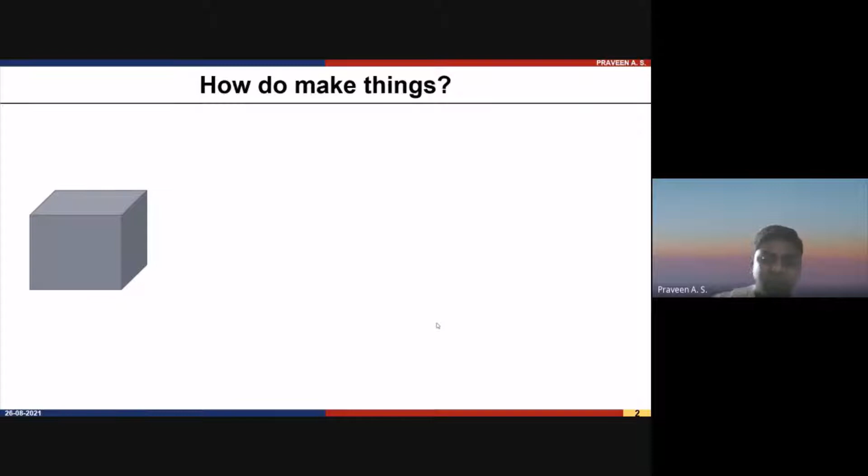Before going to the topic, you should know why additive manufacturing is very important. Let me ask you this question: how do you make things? How do you convert a chunk of bulk material into something useful, like this product? You have a box of material, and you want to make a useful product—for example, a spanner. So how do you make this spanner?

There are different manufacturing approaches. You can use formative manufacturing techniques, or subtractive manufacturing techniques. The third and most recent technique is additive manufacturing.

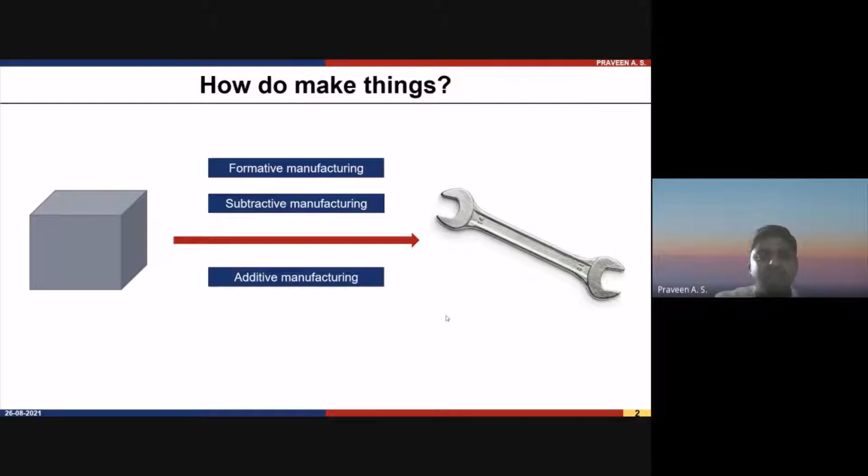Let's look at these three categories briefly. What is subtractive manufacturing? I hope you're all from a mechanical or manufacturing background—you know subtractive manufacturing removes material from the bulk chunk using different tooling approaches. The most commonly used are CNC machines and machining processes like milling, grinding, and drilling. All of these come under subtractive manufacturing—we remove material from the bulk to get the final desired product. Here you need specific tooling, different kinds of tooling to realize different parts.

Next is the formative process, which comes under forming. You know what forming is—it's like a smithy. We take the bulk material and apply force to deform its shape to get the desired product. This can be done in a cold or hot condition.

Casting also comes under formative manufacturing. In casting, we have a mold with a hollow cavity that gives the desired shape. We pour molten metal into it, give sufficient time for cooling, and then remove the mold to get the desired shape.

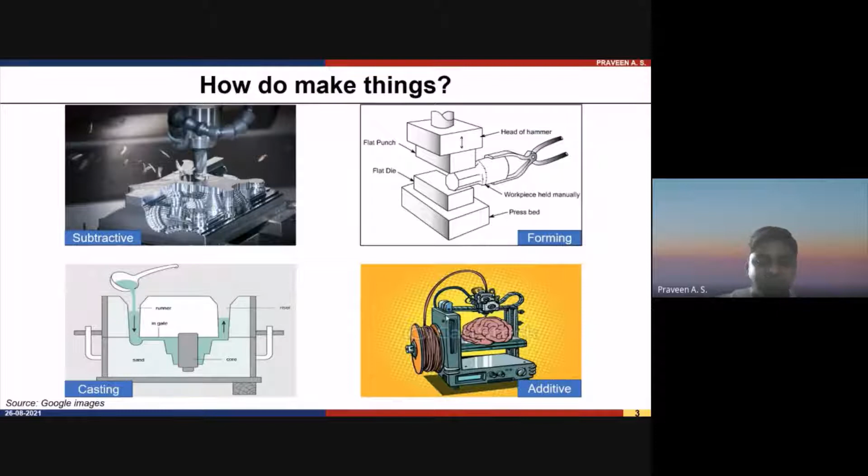The recent technique we are very much interested in is the additive manufacturing process. Why everyone is interested in additive manufacturing is that we can generate complex shapes of components at an easier or faster rate—no complexity required. That's why nowadays additive manufacturing processes are of great interest in industry and academia, with researchers and industry people moving towards developing these techniques for their own applications.

This topic is especially for ceramics. Conventionally, ceramics are processed using spark plasma sintering, hot pressing, pressureless sintering, or slip casting. These conventional techniques have limitations—they can only fabricate simple geometry with moderate size, not big size. Also, processing ceramic material is very challenging because when we machine it, it causes breaking due to its brittleness.

That's why researchers are very much interested in developing ceramics through 3D printing. With 3D printing, we can fabricate almost near net shape structures with some complexity, and we can make them in no time.

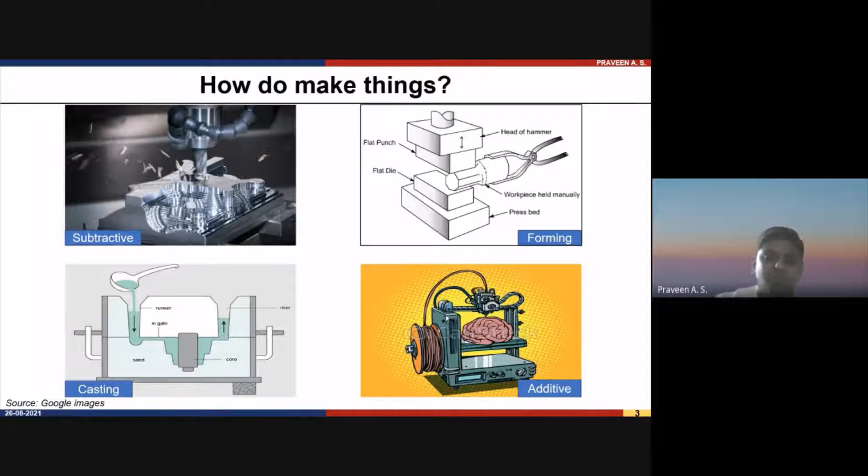So another question I want to ask is: what is additive manufacturing and 3D printing? Are both the same, or are they different? Can we use these terms interchangeably, synonymously?

So nowadays all the processes are considered, so as per ASTM standard, there are seven additive manufacturing processes. All are considered as either additive manufacturing or 3D printing, but you should understand that there is some difference between additive manufacturing and 3D printing.

Here you can see the definition given by ASTM, the American Society for Testing and Materials. They formulated a committee especially for additive manufacturing technology in order to differentiate and standardize each process. They have given the definition for additive manufacturing as a process of joining materials to make objects from 3D model data. You need a 3D model for making any product with additive manufacturing techniques.

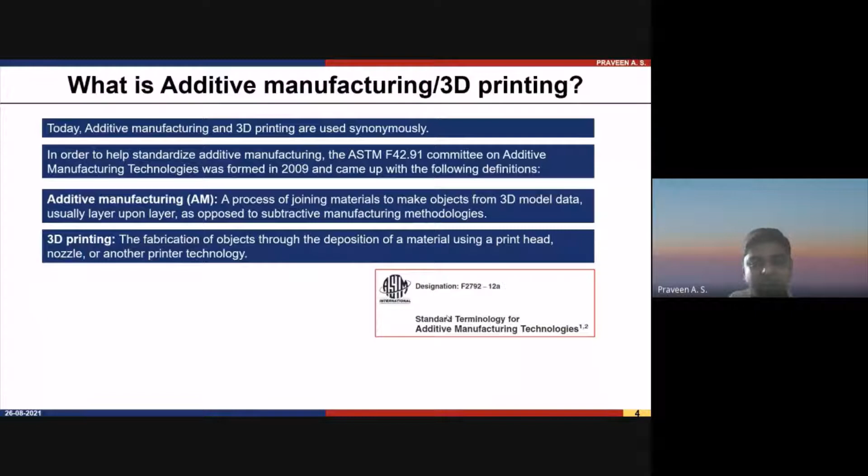Now, as I told you, the reason we are using additive manufacturing technique in all areas - whether conventional techniques like formative and subtractive manufacturing are not suitable, or whether we have to eliminate these processes and only focus on additive manufacturing - that is the question.

I will tell you an example. If you consider biomedical application, we need to fabricate complex designs. Suppose you are designing an implant, that implant design will vary from patient to patient, one person to another. That time we can use additive manufacturing techniques. The conventional technique like formative and subtractive manufacturing is not suitable for fabricating a complex shape with a low number of parts to produce. That's why additive manufacturing is very popular in biomedical applications.

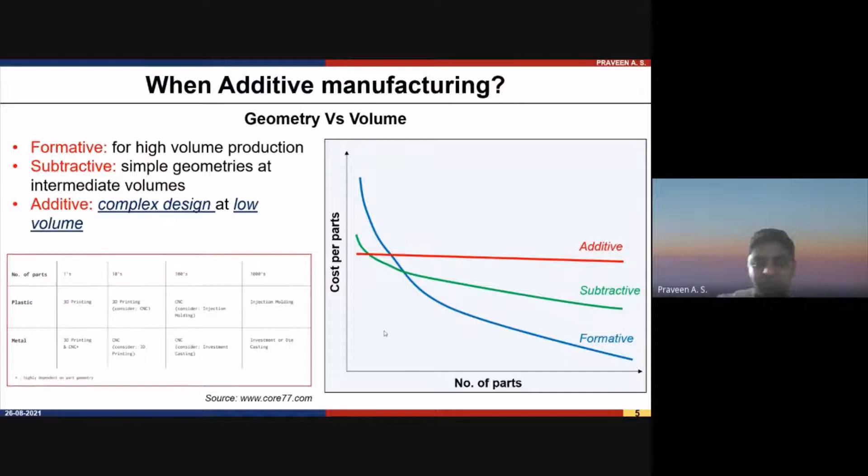Let's see the advantages and disadvantages of additive manufacturing technique. As I told you, additive manufacturing adds material in a layer by layer fashion. Whenever you require to fabricate any complex geometry, especially for biomedical application, we have to rely on additive manufacturing, because we can easily fabricate this complex geometry at a very faster rate. If you go for conventional methods, you have to process the material through different processing techniques - first milling, then drilling, grinding. That is a very complex and time consuming process. But in the case of biomedical application, we cannot develop an implant that way.

We have to develop the implant in a very short period of time, because the patient is suffering from injuries. So we have to replace that implant at a faster rate. That can be achieved through additive manufacturing and rapid prototyping. The additive manufacturing technique was earlier used for rapid prototyping, but nowadays we are using this technique for realizing the final component.

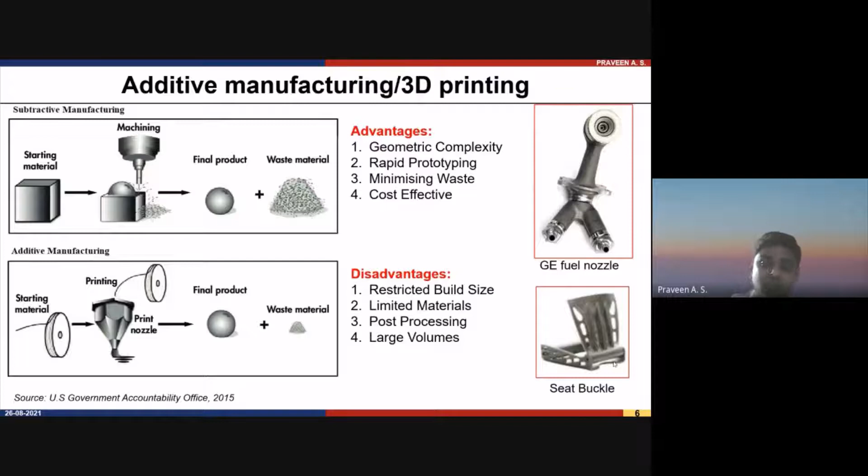Even if you could reduce the weight of any aircraft component by just 0.5 kg, we can save fuel by around 100 liters per year. There is some statistics on that. So all aerospace industries are trying to implement these kinds of designs to reduce the weight of the aircraft.

So then let's see what additive manufacturing is. As I told you, I'll be covering some of the basics of additive manufacturing. Additive manufacturing is a process by which we can fabricate a component in a layer by layer fashion. The first basic thing you require is digital data - you need a 3D model of the data to be fabricated. You should have that. So how can we create that data?

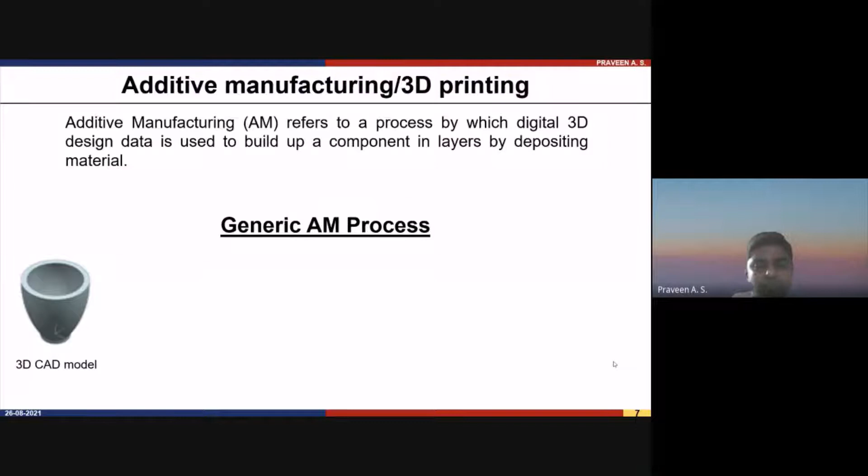Nowadays there are standard 3D modeling software available - Fusion 360, CATIA, ProE, there are different varieties of software. In that software, you can create that 3D model. There's also some other techniques, where we can use laser or optical scanners - if you scan the object to be printed, using some image processing software, you can create the 3D data.

The third technique, which is widely used in biomedical applications, uses CT scan data and MRI scan data to develop the 3D model data. For that, in biomedical applications, there are sophisticated image processing software like Mimics, which is widely used but very expensive. If you are a beginner doing research in biomedical applications, you can use ITK Snap, a free software, to analyze the CT scan data.

CT scan data is a series of images. When you analyze through the software, you can use that image data to create the 3D model. So if you want to develop any implant for any biomedical application, we have to use this technique. We have to process, we have to take the CT scan of the damaged part or any broken bone, or MRI scan. From that MRI scan data, you can process through the software so as to develop the 3D model. So that's the first step.

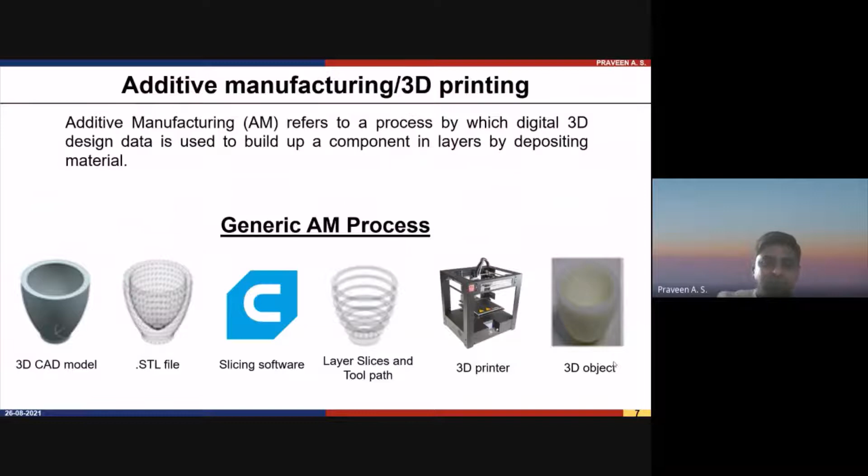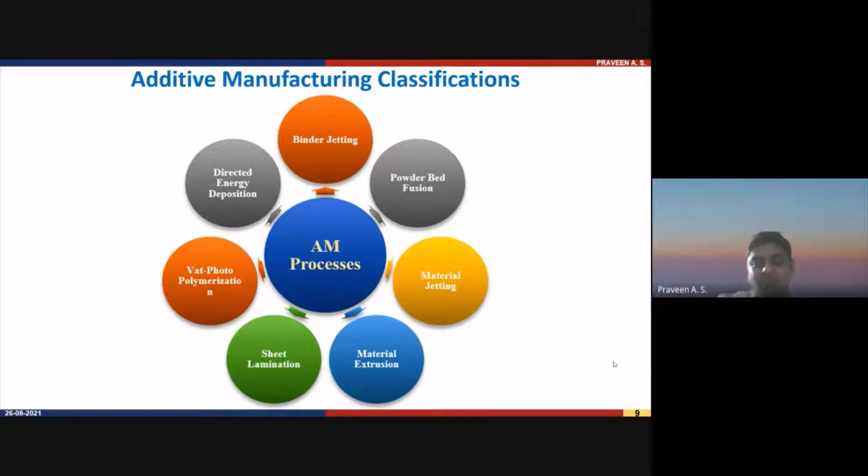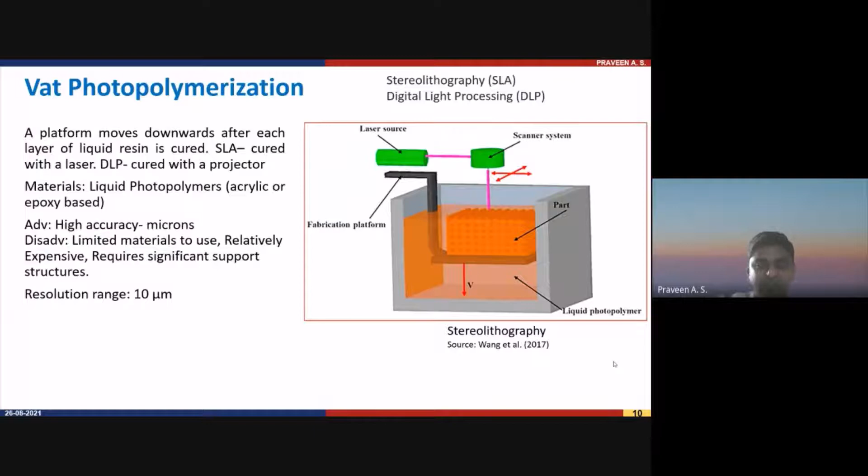As per the ASTM F42 committee, they have classified additive manufacturing into 7 categories: binder jetting technique, powder bed fusion technique, material jetting, material extrusion technique, sheet lamination, vat photopolymerization which is called stereolithography, and directed energy deposition. In this talk, I'll be focusing on the material extrusion technique. You already have gone through these basic classifications of additive manufacturing process.

With that assumption, I'm moving to the direct ink writing technique. Direct ink writing technique is similar to material extrusion. You are all familiarized with the FDM process, right? FDM process is a material extrusion process. In FDM, the material to be printed is in the form of a wire or filament, which is fed into a nozzle, a heated nozzle.

The heated nozzle will be heated to a temperature sufficient to melt the filament. In the case of polylactic acid (PLA), the usual temperature will be around 200 to 220 degrees Celsius. So if you apply that heat to a heated nozzle, the material will get melted and flow through that tiny nozzle, which has a diameter of 0.4 mm.

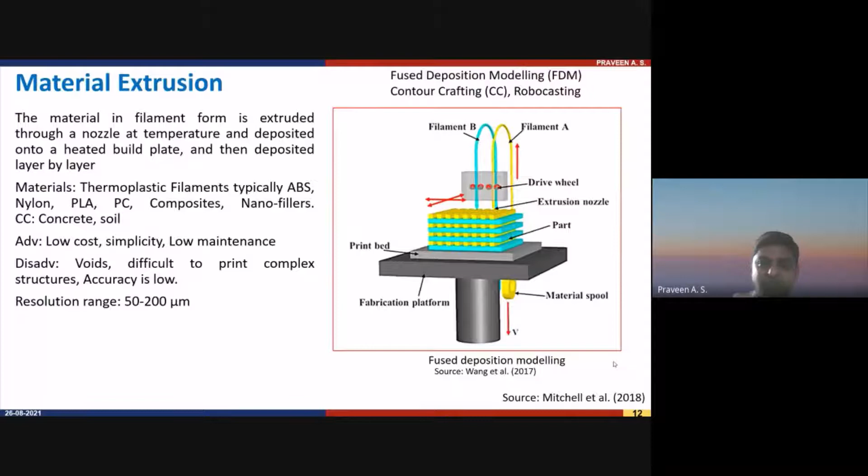So thereby the deposition is taking place. That process path and everything you have to create using the slicing software. So that is a material extrusion process. In today's discussion also, it's material extrusion, but there is some slight difference from the FDM process.

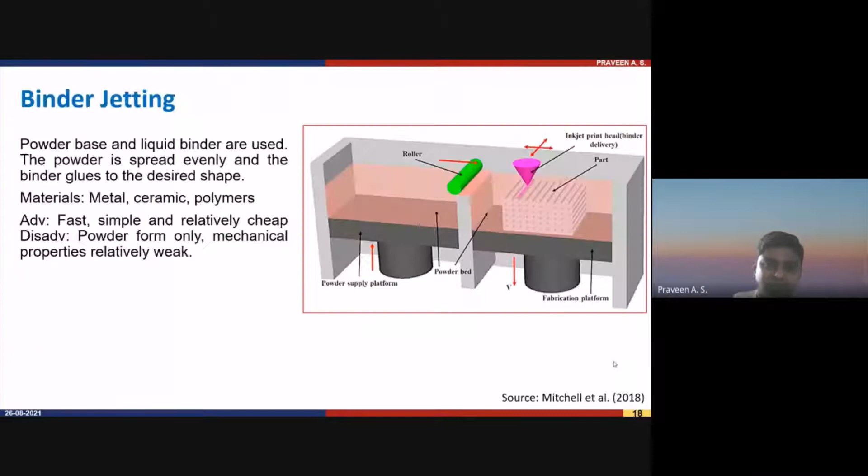So we'll move on to the second phase of my talk, which deals with direct ink writing techniques. As I told you, direct ink writing is an extrusion-based additive manufacturing technique. What you need is a material in the liquid phase—it can be an ink or a gel, whatever it is. That gel will be extruded through a small nozzle.

Here you can see on the left hand side—this is the extrude barrel. At the end of the barrel, you have a nozzle. This barrel will be filled with a suitable slurry, which will be extruded with the help of a pneumatic or some mechanical means, so that the slurry comes out from this tiny nozzle, and this material will be deposited based on your tool path, which is created in the slicing software.

So there is some slight difference between direct ink writing and FDM, which I will explain in the next slide. Through this technique, we were able to synthesize ceramic material—that is one of the advantages.

Previously we have seen there are 7 methods of doing additive manufacturing, and these 7 methods are suitable for fabricating ceramic materials. But why I chose direct ink writing is: in the case of a powder bed process like SLM and SLS—selective laser melting and selective laser sintering—these machines may cost around 4 crore, and there you need to fabricate a powder bed and an expensive laser.

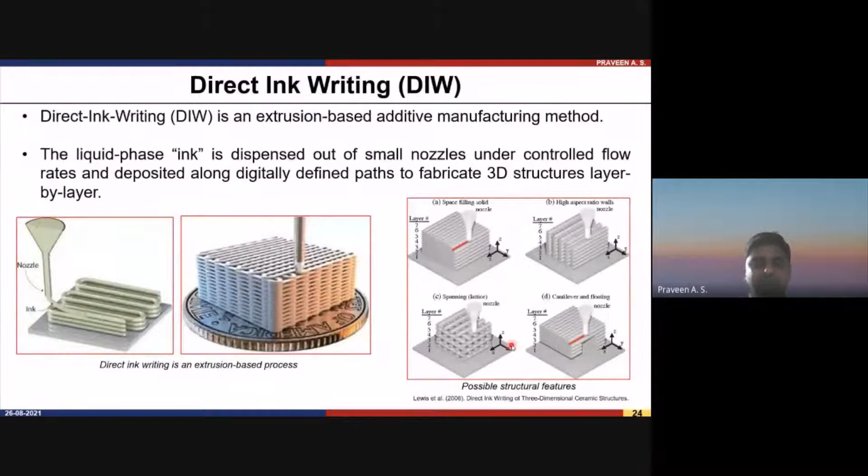But here what happens is, the starting point is that we create a suitable ink with some suitable binder or dispersant, with a suitable ceramic material of suitable size and shape. With that we create the ink. That ink will be dispensed through different mechanisms, it can be pneumatic, mechanical, or screw extrusion, dispensing it through a tiny nozzle. This design is based on your requirement.

So here the very important factor is its rheological properties, whether the ink is extrudable or not, its printability. That is very challenging. So the challenging feature of direct ink writing is the preparation of the suitable ink. The ink design is very important. So if anyone wishes to work on direct ink writing, you should definitely have some collaboration with chemistry people, so that they can suggest the suitable binder, solvent, dispersant, etc.

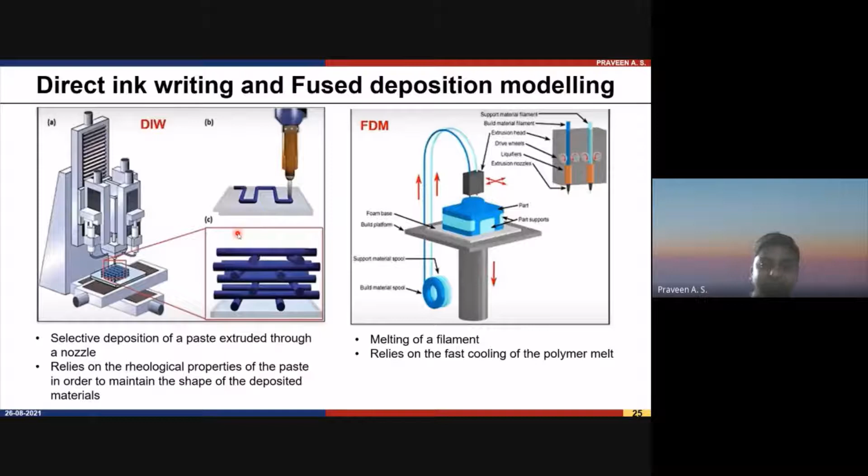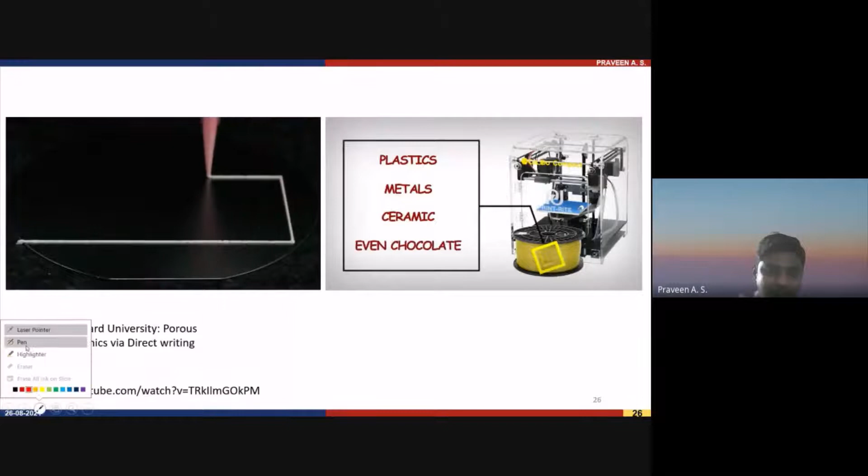Models are printed from any number of materials, from plastics, metal, or ceramic, even chocolate. Our printer has two main moving parts: the print plane.

So here you can see on the left-hand side, a direct ink writing technique system created by Harvard University, by Professor Lewis. They use this technique for creating porous ceramics. This is the basic of how a direct ink writing printer works.

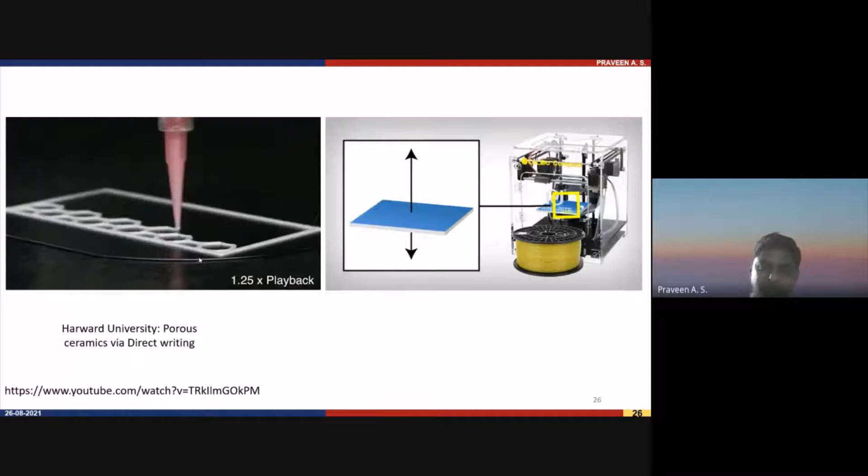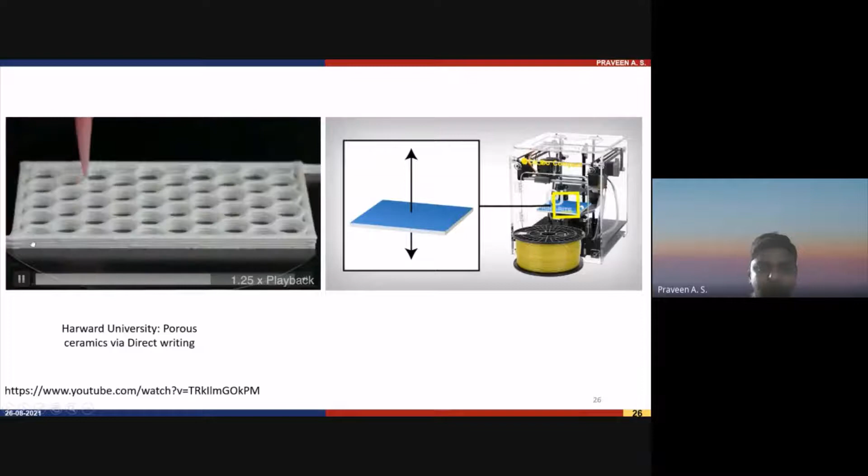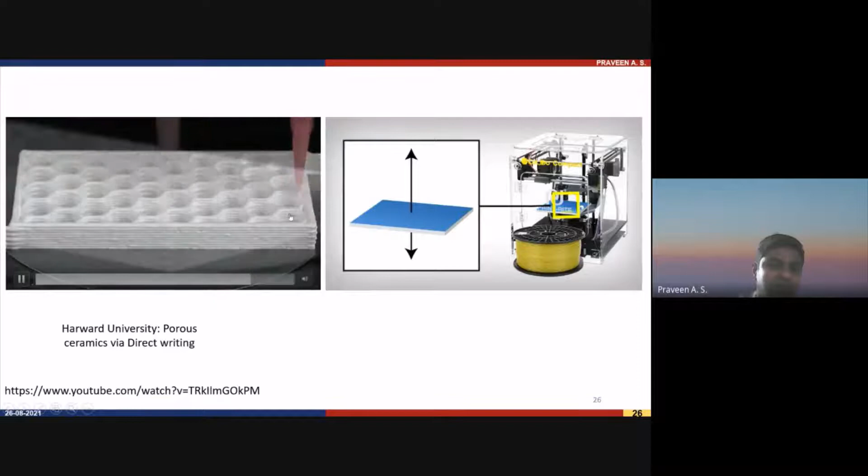So this is how we can realize the part using direct ink writing. Here you have to get a continuous flow; it should not get any clogging. If it gets clogging, proper deposition won't take place. This clogging depends on its rheological properties, how much pressure we are applying, what the nozzle size is—everything is dependent on that.

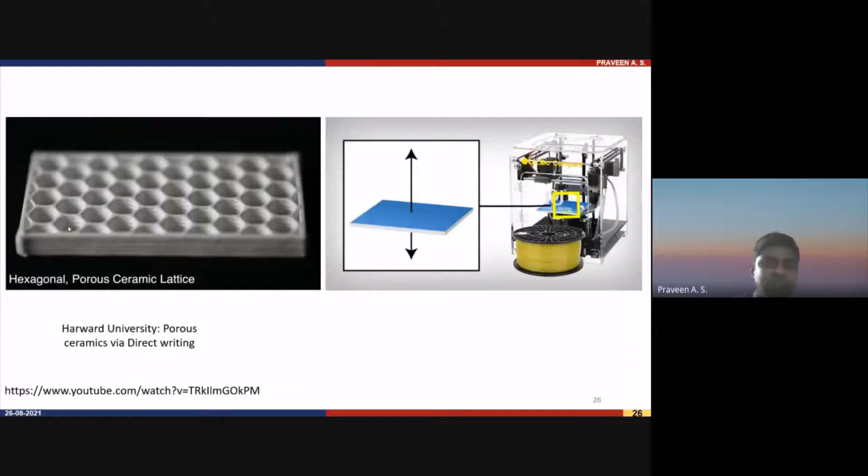So in the coming slides, we will see each factor and how it influences direct ink writing. I referred to a lot of papers, and based on that, we created a 3D printer based on the direct ink writing technique. This is a conventional FDM printer; what we did is we removed the heated nozzle.

Instead of that, we fixed a barrel like this. This is the dispensing barrel where we fill the ceramic ink. We started in a very humble way. So this is the barrel where we fill the ceramic ink. The ceramic ink will have sufficient suitable rheological properties, and the end of the barrel will be fitted with a nozzle like this. You have varieties of nozzle sizes, 0.6 to 1.6, based on your feature size, you can select.

As for how we dispense this ink onto the bed, it's with the help of a pneumatic control. We prefer pneumatic control—I will explain why shortly. This is the print table. So this is nothing but a modified 3D printer, an FDM printer, with the heated nozzle replaced. The rest of the setup is the same; the only thing we introduced is this dispensing barrel and its extrusion system.

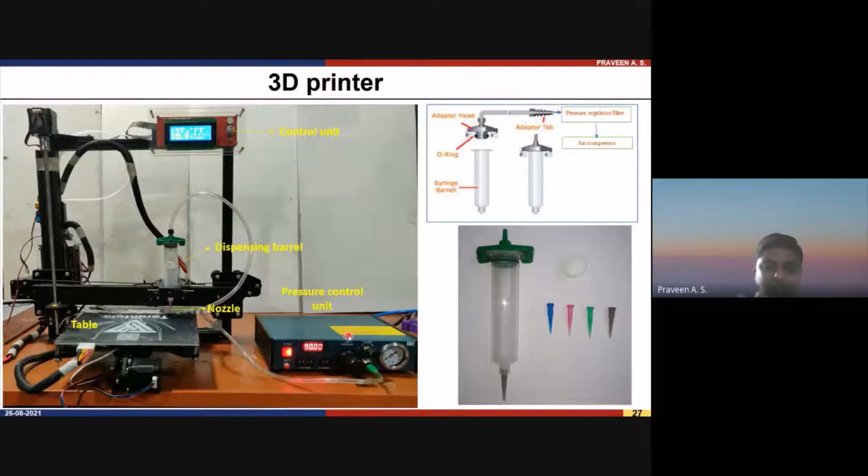That part's 3D model has to be created. Then that will be inputted into a slicing software. There are different slicing softwares available, like Cura, Slic3r, and FlashForge, and all. Using that we can slice it. So slicing will give the layer data.

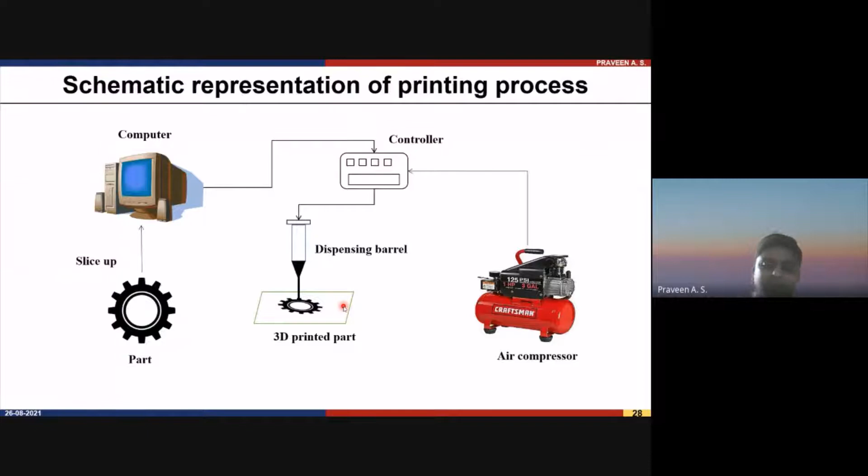That can be given to the control system, the machine control system. So here I will be filling that barrel, the dispensing barrel, with a suitable printable ink, and I will apply pressure through an air compressor, pneumatic pressure. I can control the pressure value also, so that proper deposition of the slurry will take place. So this is how the direct ink writing process based on the pneumatic extrusion system works.

The main component in this direct ink writing is the dispensing system. Dispensing means we have to eject the slurry inside the barrel to the print bed so as to get the desired product. For that we can choose different dispensing systems, like a pneumatic dispensing system, a piston-based dispensing system, and a screw-based extrusion system.

In the pneumatic based extrusion system, this end of the barrel will be fitted with a valve. The valve will be actuated with the help of pressure. So this valve opens and the pressure comes on top of this ink, and with that pressure it will create a compression inside the ink, so that because of this compression the fluid will eject. This is the first case.

In the second case, you can see there is a piston. The pressure applied on the ink will be uniform in this case compared to the pneumatic one. In the pneumatic case, there can be a delay in compression of the liquid, and improper deposition can also be caused because of this delay. But with the piston, you can apply uniform pressure along the ink so that uniformity can be ensured. That's why I have taken this piston-based extrusion system.

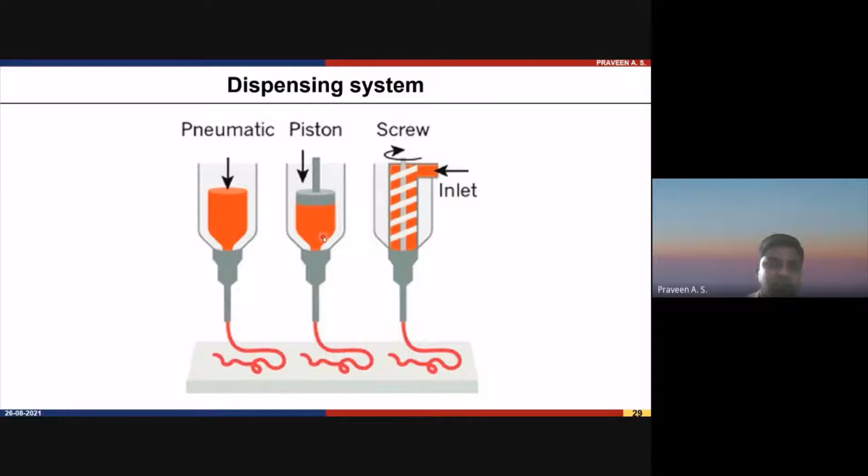We started with a piston based extrusion system, which is sufficient for bioprinting also, because the bioprinter ink will have some kind of cells, right? If you use this kind of screw type dispensing system, the cells will get damaged because of rotation of the screw. But that we can avoid in the case of a piston-based extrusion system. So for bioprinters, I come with this kind of dispensing system. That also you have to remember.

Another thing is that, as I mentioned, you have to prepare a suitable ink. The ink should have the following characteristics. First of all, the ink should be homogeneous. There should not be any air bubbles - if any air bubbles are there, the continuous flow of ink during print will be disturbed. Also, it should not cause any agglomeration.

Agglomeration means forming a chunk of material inside the barrel, and that causes choking of flow. The nozzle will choke because of this agglomeration. You should have sufficient viscosity so that you don't need to apply much pressure.

That depends on how much volume of solid material you are adding to the system. The third thing to consider is the volume fraction of ceramic particle. As a thumb rule, you should have at least 50% volume of ceramic particle in your ink design.

If the ceramic particle content reduces, the density of the printed part will also get reduced. To give strength for the ceramic printed part, after printing you have to take it to the sintering process, and during sintering there may be shrinkage of the component.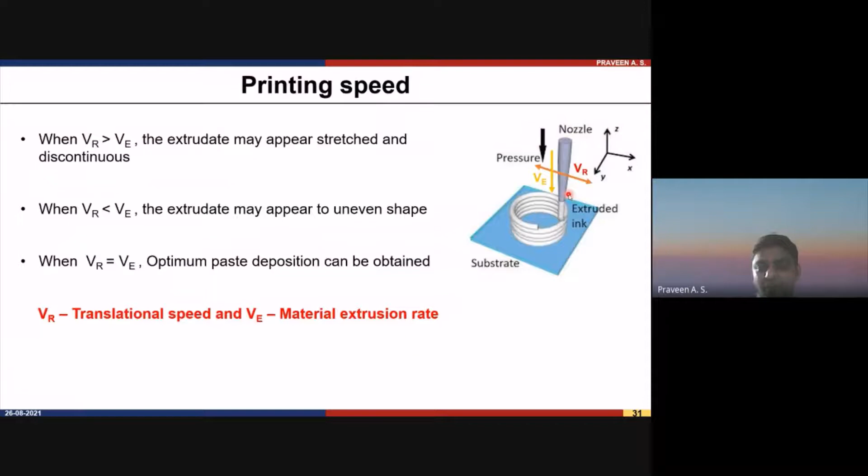If VE, the material extrusion, is very high compared to the deposition, the printed part won't be as required, you'll get an uneven shape with more deposition. Another case is when VR, the translational speed, is very high compared to VE. Then the nozzle moves too fast and you won't get proper deposition; it can be discontinuous.

Let's see from this image, it will be very clear. We get a proper continuous deposition because we are matching the material extrusion rate with the printing translation speed. These speeds vary from material to material, depending on the ink rheology and nozzle diameter, so you have to find the optimum value through trial and error.

Here you see the printing speed is very high, so you see discontinuity in the printed line, because printing is taking place at a faster rate than the deposition rate. But in the third case, you see a chunk of material, a bulk, because the material extrusion rate is very high compared to the printing speed.

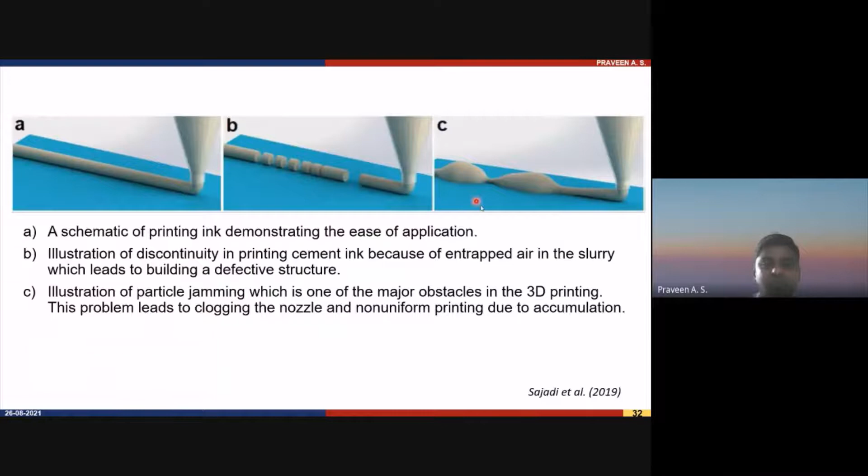There is a numerical method to find the best extrusion rate, some mathematical expression you can adopt. If you apply Bernoulli's equation, you can find that. This is a very important thing when we go for the direct writing technique: the rheological properties of the ink which you prepare.

For example, we have seen that paste, like toothpaste. When the paste is inside the container, it will have high viscosity, but when you apply pressure, the paste will come out very easily. So it will have some shear thinning effect - shear thinning effect is nothing but when you apply some pressure, its viscosity will get reduced.

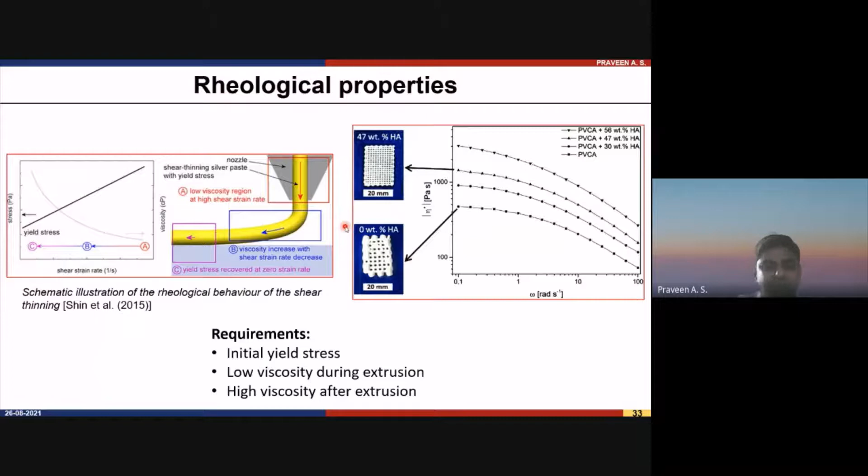Here you see, at the top, as I told you, in direct ink writing we can develop a lattice structure or a spanning structure like this. But because of improper design in the ink or inappropriate solid content, the structure got collapsed - the printed line doesn't have the strength to withstand the printed line above it.

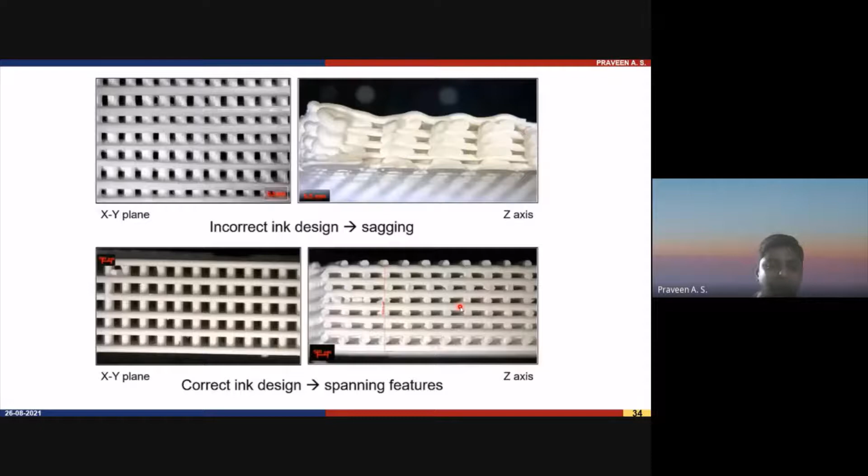This is because of improper ink design. But when we tune that viscosity, with the help of adding more solid loading, we are able to achieve the desired spanning structure. So ink rheology and ink design is a very important factor when we go for direct ink writing of ceramics - we have to keep this in mind.

So what kind of nozzle shape do you have to choose? Commonly there are two types of nozzle shapes - one is called cylindrical, the other is called tapered. We'll be using tapered nozzle because the flow rate will be very high in that case. Literature and simulations already done by researchers establish that, as compared to the cylindrical nozzle, the tapered nozzle will give more flow rate.

We have to use this tapered nozzle whenever there is a limitation in applying extrusion pressure, or your system is not able to give higher pressure - in that case, you have to go for a tapered nozzle. At the inlet, the cross-sectional area gradually varies, so that more deposition of ink will take place, but in a cylindrical nozzle it is a constant cross-sectional area. This is proved by some researchers - so you can use tapered nozzle whenever there is a restriction of pressure limitation.

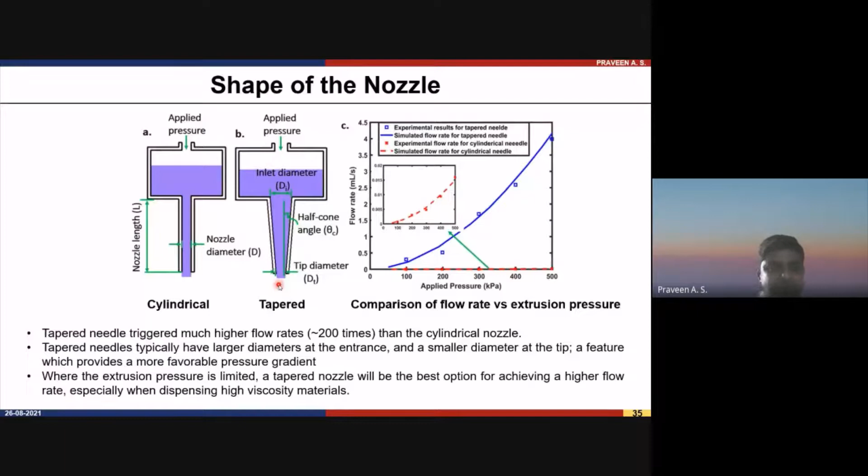So this is a summary of what I have discussed previously. Obviously there are different factors, and their relation we are going to see now.

One of the parameters is the nozzle size. You can use nozzle size from 0.1 to 250 micron, but you have to see that it is 50 times the particle size. You have to choose the nozzle in that way, and also consider what is the resolution of your final object.

The viscosity range will vary based on the material and based on the material morphology. In order to get a smooth flow, the particle size or particle shape should be spherical. If it is spherical, you can ensure smooth flow.

The printing speed I already told. The printing speed and material extrusion rate you have to match. The commonly used value is 0.1 to 5 mm per second. This is to give us some tentative idea, based on whatever literature I have referred, I am just summarizing.

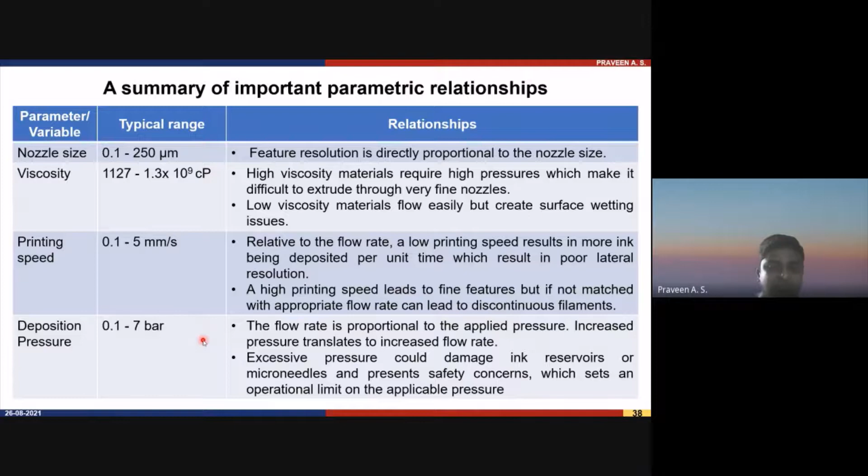The pressure you can vary from 0.1 to 7. You know that the flow rate is directly proportional to the pressure. How much material comes out through the nozzle depends on the pressure. If you increase the pressure, the flow rate will also increase, but you cannot increase it beyond a certain level because of safety reasons. Sometimes the connection between the barrel and nozzle can get separated because of excess pressure. So you have to see what is the optimum value of pressure.

Another parameter is the stand-off distance, which is the distance between the print bed and the nozzle. Conventionally we take the stand-off distance as the size of the nozzle. If we are using a 0.6 mm nozzle, we have to set the stand-off distance or layer thickness as 0.6.

If the layer thickness is very low, what we can see is it will drag the printed line. If one line is already printed, and you print another line on top of that, if the stand-off distance is the same as the printed line, the nozzle will go into that printed layer and drag that line. So you won't get that extra dimension, and your printed part will get collapsed.

If the stand-off distance is in excess, more than 3 times, there won't be proper deposition. If you are making any spanning structures, you cannot ensure proper deposition of the slurry on the printed line. So we have to optimize these things.

If you read the literature, there are some values mentioned, but it will vary based on your composition, your ink rheology or ink design. So these kind of values you have to establish with the help of some trial experiments you have to execute.

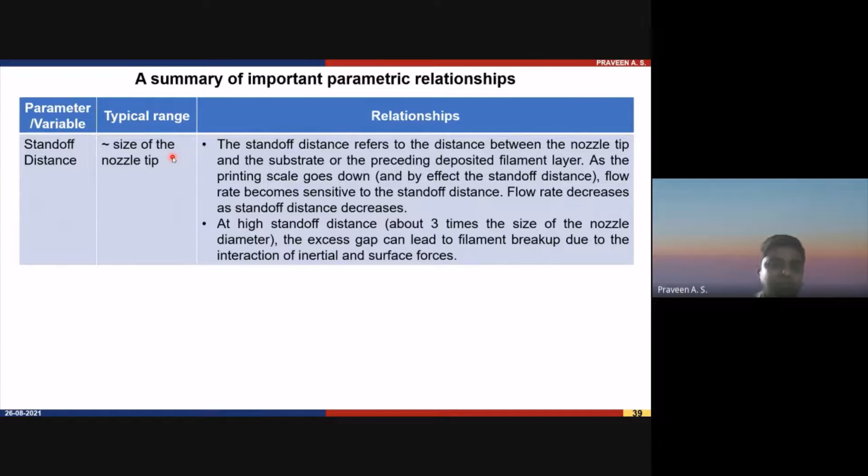So these are the things which I would like to share with reference to direct writing - what are the factors, what are the different types of dispensing systems we have to consider, and what are the properties we have to consider for making a suitable ink. Now I would like to share the importance of

direct writing in realizing bioceramics. You know that bioceramics come under biomaterials. Biomaterial means it's a class of material - it can be a ceramic, a metal, or a polymer. Ceramics are widely used in biomedical applications because ceramics are bioactive materials.

What is a bioactive material? The cell can easily grow over these ceramic materials compared to metal. Metals are also inert materials, but they won't participate in the cell growth and other biological activities. But bioactive ceramics will participate in cell growth - the cell can grow over that surface.

Another class of material is bioresorbable material. Bioresorbable material is nothing but material that will get degraded as the cells grow. The example is magnesium.

This one is used as a bioresorbable material, a ceramic. When it comes to ceramic, tricalcium phosphate and hydroxyapatite are considered as bioresorbable materials.

These bioceramics should meet certain requirements for biomedical applications. The first and foremost thing is the material you are selecting should not cause any toxicity to the patient, it should not damage your biological system. Usually the ceramic materials used for biomedical applications are alumina, zirconia, calcium phosphate, hydroxyapatite, calcium carbonate, and calcium sulfate. These are the bioceramic materials used for biomedical application.

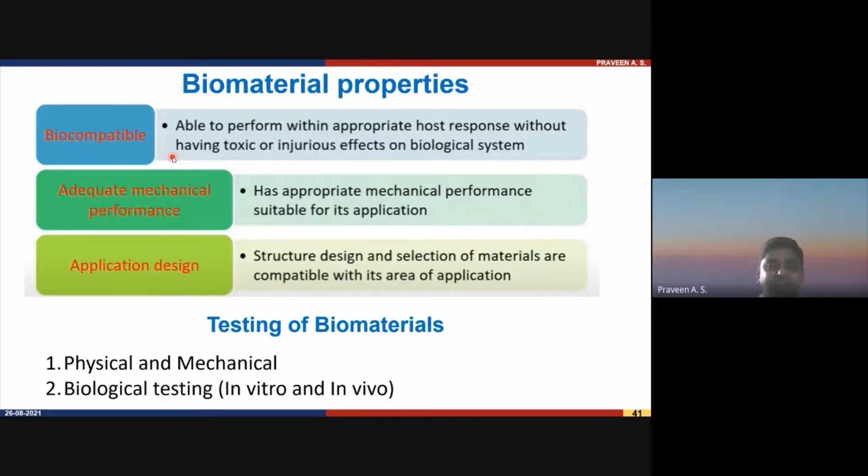In our research, at least we can make some mechanical study, or propose some scaffold design using direct writing techniques with bioceramics. So now we'll come to the direct writing of ceramic alumina, which we carried out in our lab.

As I told you, ink design is the most important thing when you consider direct writing. Here we have taken alumina particles of 45 nanometer size, spherical in shape. You can see from the SEM morphology that it's spherical in nature. This spherical nature will help the flow; extrusion will be easier compared to angular, irregular shapes.

Here I have taken a binder material, PVA, polyvinyl alcohol. I chose polyvinyl alcohol because both are biocompatible—alumina is a bioceramic, and my polymer is also biocompatible, since PVA is a biocompatible material. First we have to prepare a PVA gel.

At different proportions we have to make that PVA gel. Then the PVA gel will be mixed with alumina powder using a mechanical stirrer, or you can use a ball mill for preparing the gel. Now this ceramic particle will be uniformly distributed in that gel.

Here we have taken different compositions: 50% weight of alumina as well as 55% weight of alumina. From the literature, it shows we have to choose between 50 to 80%. Why I have not tried beyond 55% is because you have to apply higher pressure, and proper extrusion of the slurry does not take place beyond that. These things you have to find out by trial and error method. So I have made the slurry as shown in this figure.

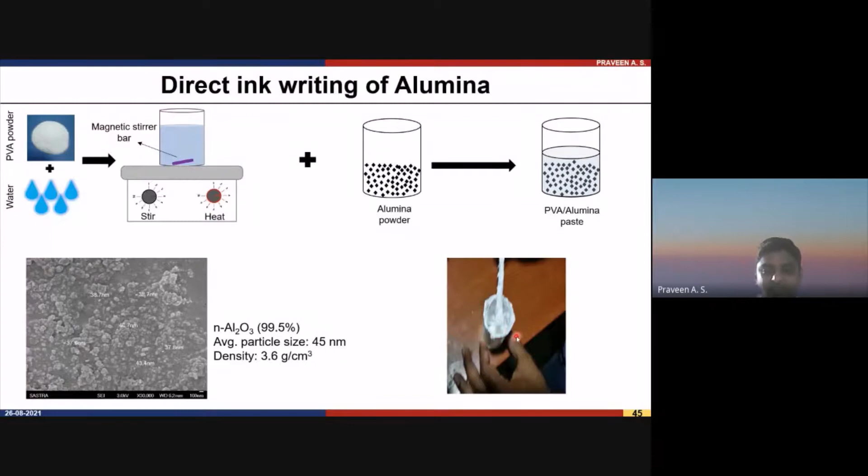So first we printed a rectangle like this. See here, without applying any bed temperature, I got the structure like this. So when I applied this temperature, somewhat, so this is our first work.

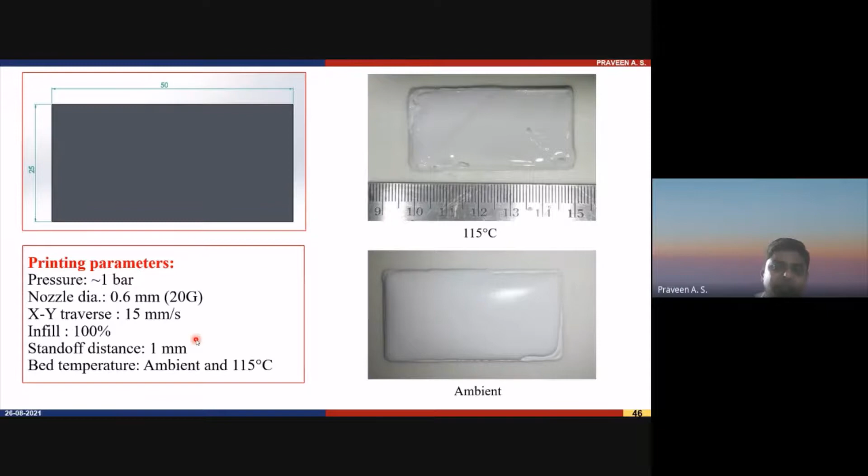Okay, which we carried out using our 3D printer. These are the parameters shown. So this is our starting. From this basic information, we try to optimize the suitable parameter for realizing a circular structure like this.

Here we see in the second viewer that the structure got fully damaged. This is because of the low slurry concentration, meaning the slurry doesn't have sufficient strength to withstand the next printed layer. Also, because of the larger size of the nozzle, more deposition is taking place.

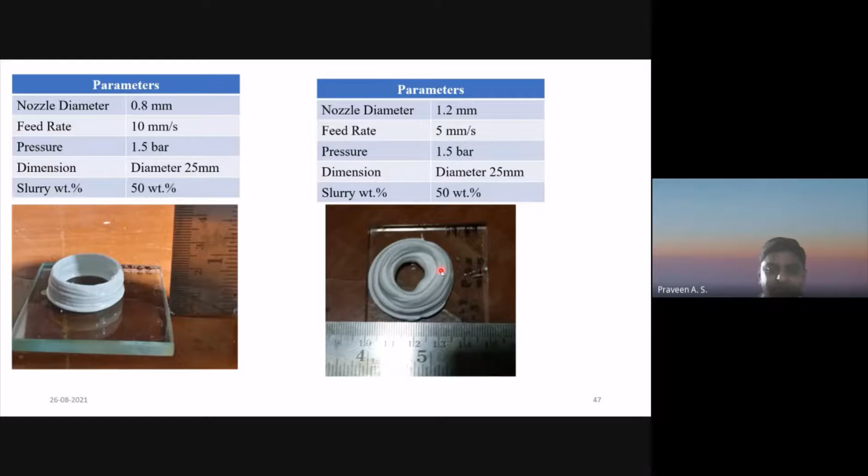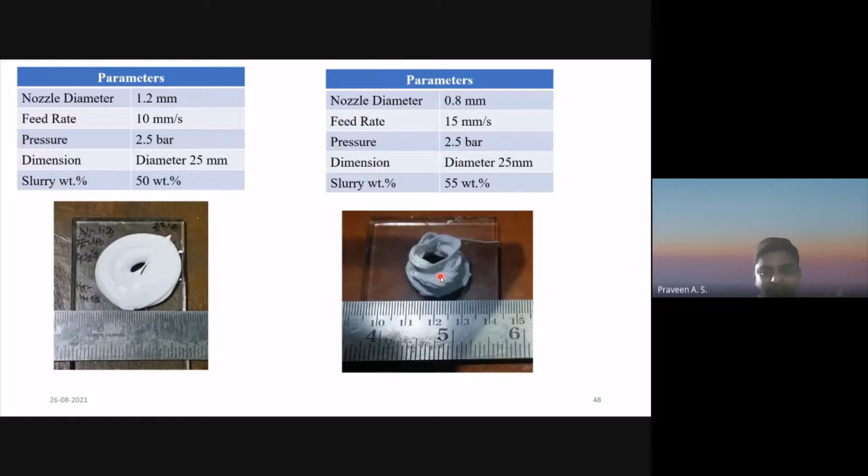That's why this structure collapsed compared to this one. See, this one is fully damaged because of very high nozzle pressure, and this viscosity is not sufficient because it's not exhibiting the shear thinning effect. That's why it's not able to stack. In this second one, you can see the structure is not rigid enough to withstand the layers, so it collapsed. So we had to do some trial and error.

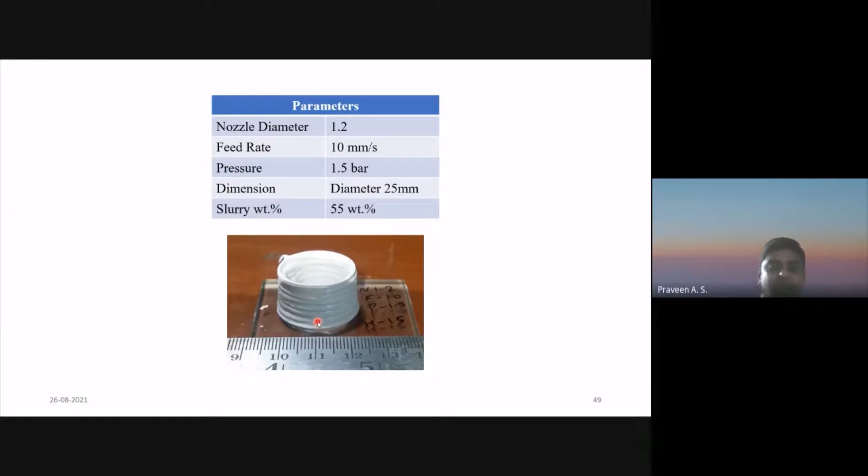Finally we achieved it. Not good, but a comparatively better structure with the help of this parameter. So with this, I will show you the video.

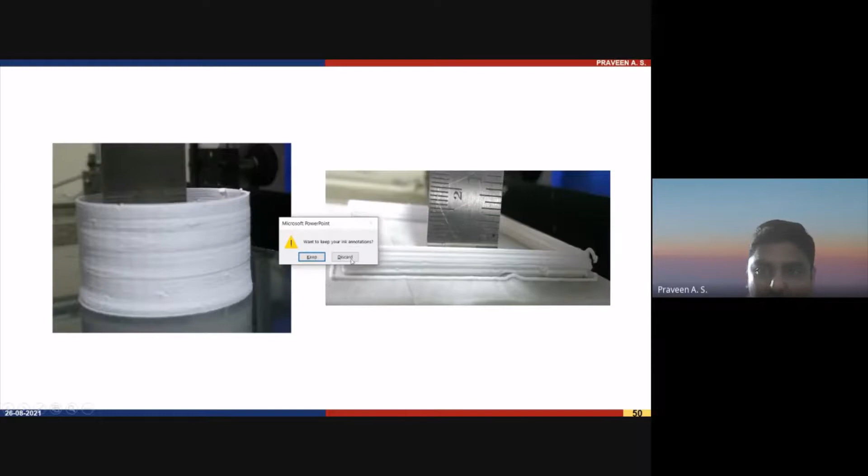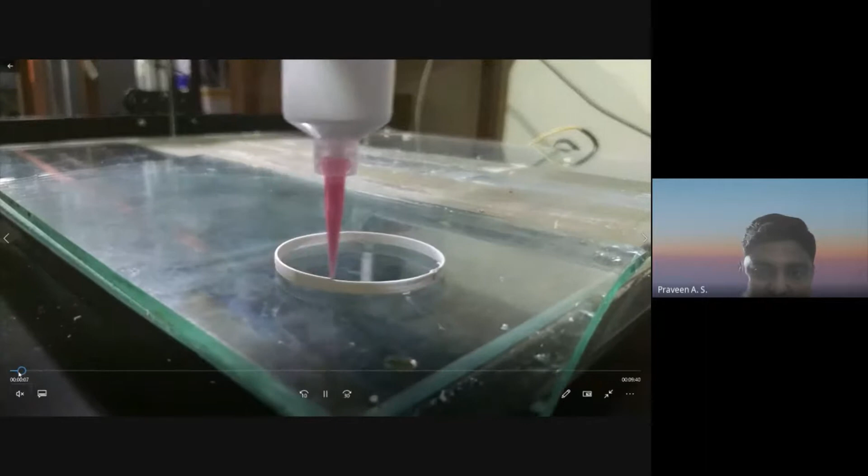So here we are able to print. I hope we can see the screen, right? The video also. Anyone can respond - can you see the video?

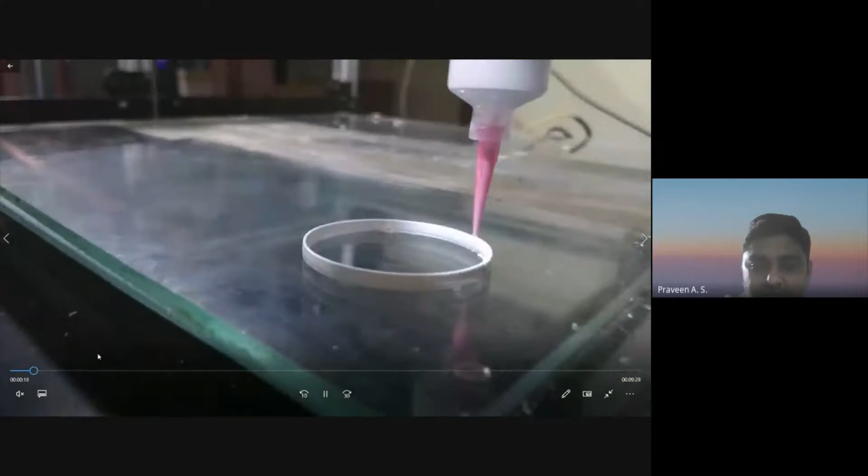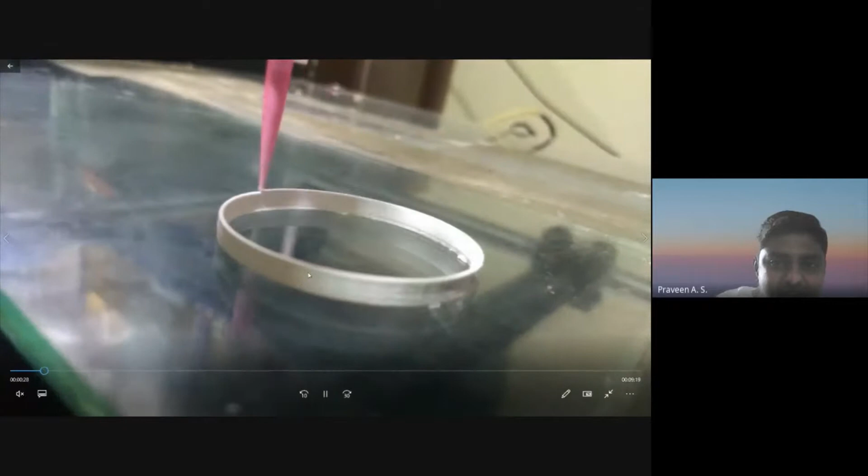Yes sir, okay. See, this is a 0.6 mm nozzle. With that, we are able to create a circular structure like this. See, the printed layer has a suitable rheological property so that it is rigid enough to withstand the next printed layer. So this is how we started our work.

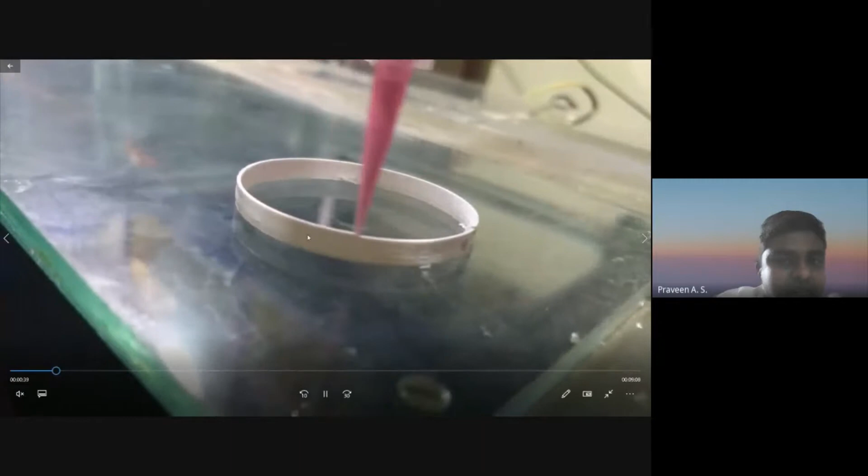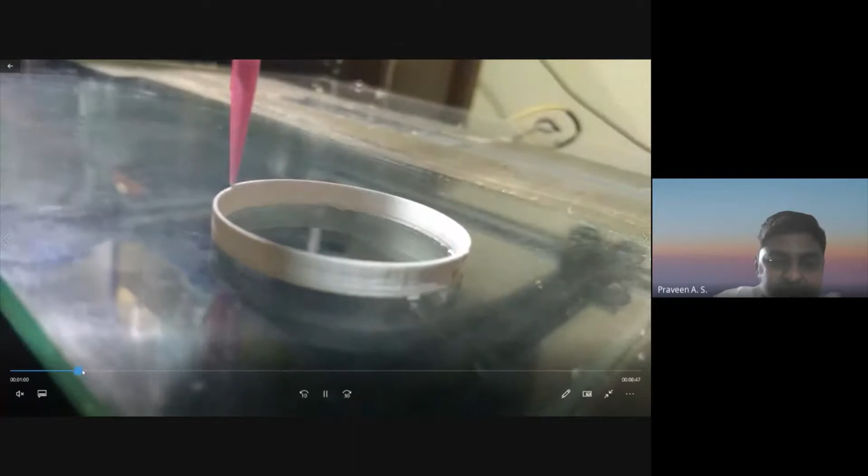So we are able to print a structure like this. We also printed a honeycomb structure. There's a lot of trial work we've done to achieve a structure like this. Here you see this wall thickness is 0.6, which is near equal to the nozzle diameter. So without any deformation or distortion, we are able to fabricate a circular structure like this.

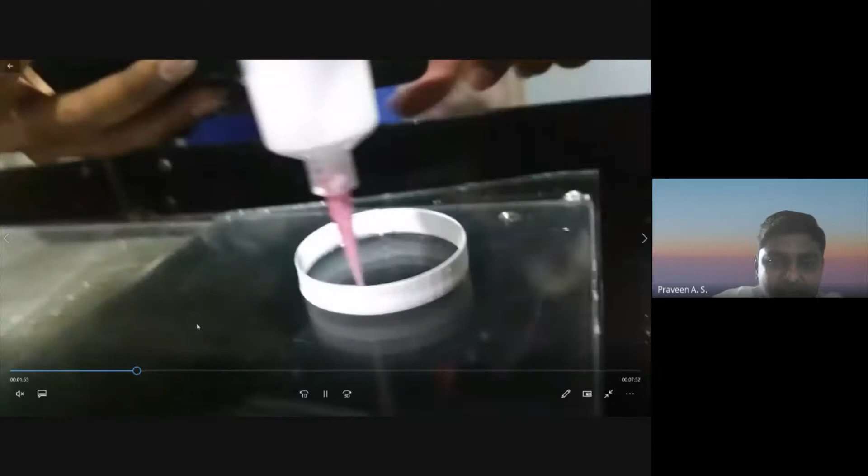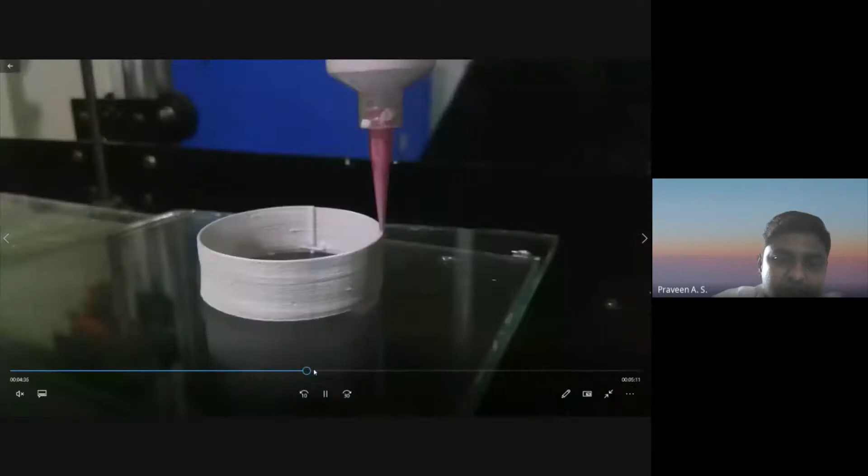So okay, just for demonstration, using the same technique, we were able to print a rectangular structure also. So here I have shown - this height is around 50 mm, 5 centimeters. We are able to print without any collapse in the structure.

Okay, so finally we arrived at a composition of 55%. So with this pneumatic type of extrusion system, we can handle this slurry of 55%. But now we are trying to develop a screw extrusion in order to handle a higher viscosity value, because as I mentioned, whenever you increase the solid loading, your part strength also increases.

So as of now, what we have done in our lab is only fabricate that green body. The next level is we have to sinter this part, and we'll see how that sintering will affect the mechanical properties. So it will take time.

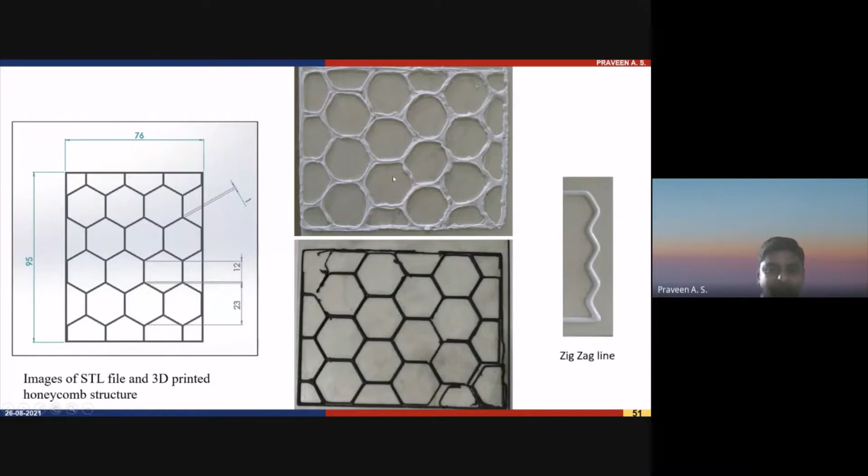So this is where we tried to develop some honeycomb structures - these are the trial works we have done. So what we can see, these are some of the printed structures: the honeycomb, circular structures. This is the rectangle I showed. And this is the scaffold structure.

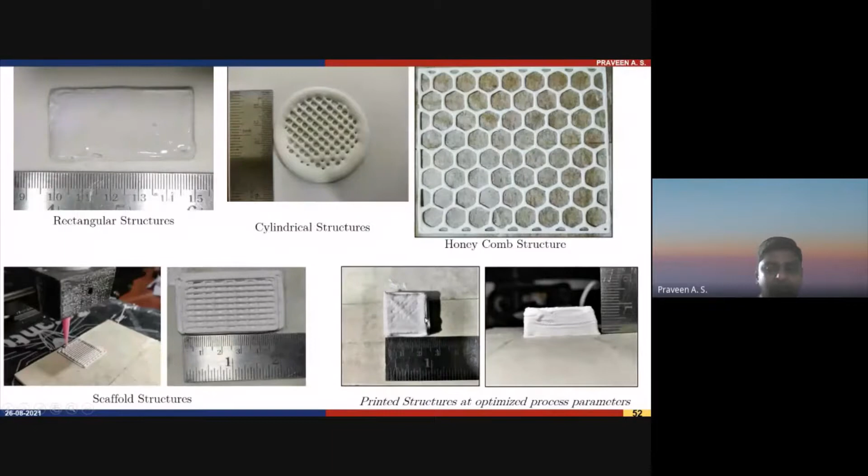So as I showed previously, with this direct writing, we are able to print this spanning structure like this. Still a lot of optimization work is going on to find the optimum slurry compositions. So this is a fully solid alumina specimen we created for compression testing.

So these are the works we are doing in my lab. Now we'll see some case studies based on direct writing, which are already available in the reference literature.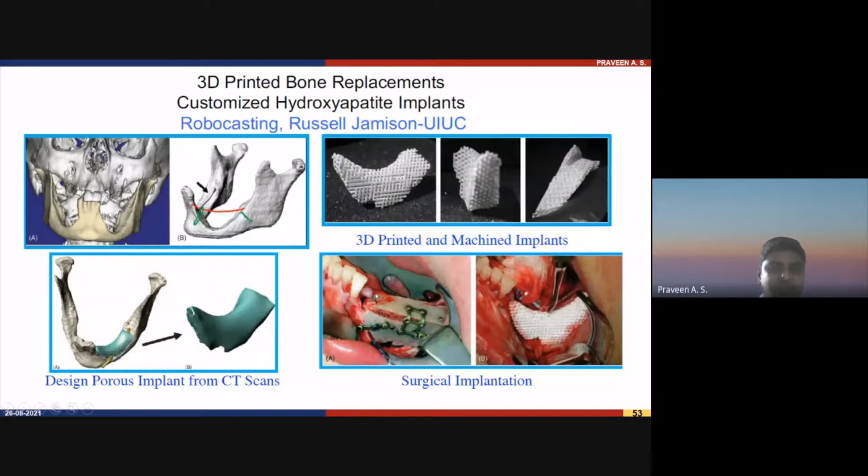So finally, after printing, we get the scaffold structure like this. They created this structure using hydroxyapatite, a bioresorbable, biocompatible material, using the direct writing technique. Then they implanted it into the patient, and they got success also. These are reported in literature.

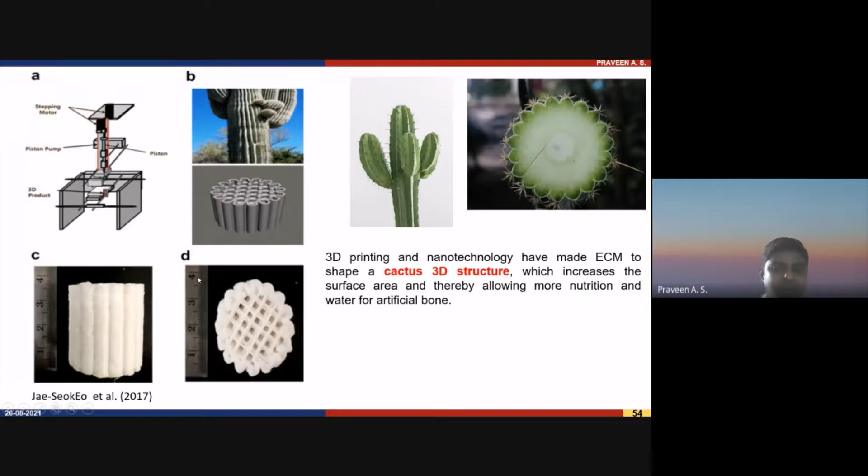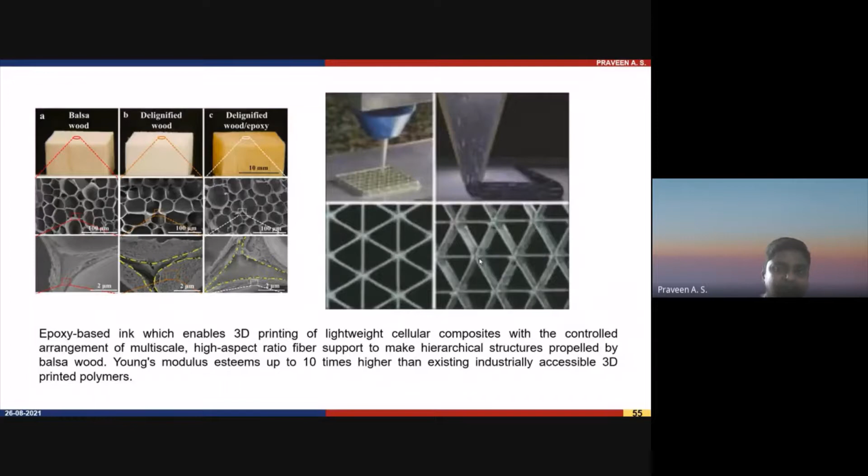Here we can try metal, ceramics, as well as composite materials. Whenever you mix two materials, it becomes a composite. As I told you, in order to overcome the disadvantages associated with bioceramics, we are trying to add some metal materials into that. That will be the second phase we are planning.

But one disadvantage is that if you go for polymers, you have to go for high conductive polymers, because the conductivity of polymers is too low as compared to metal, so you have to choose a suitable polymer material. That's why I told you that those who wish to work on this should collaborate with a chemical or chemistry person, in order to understand the physics behind selecting the binder, solvent, and dispersing agent.

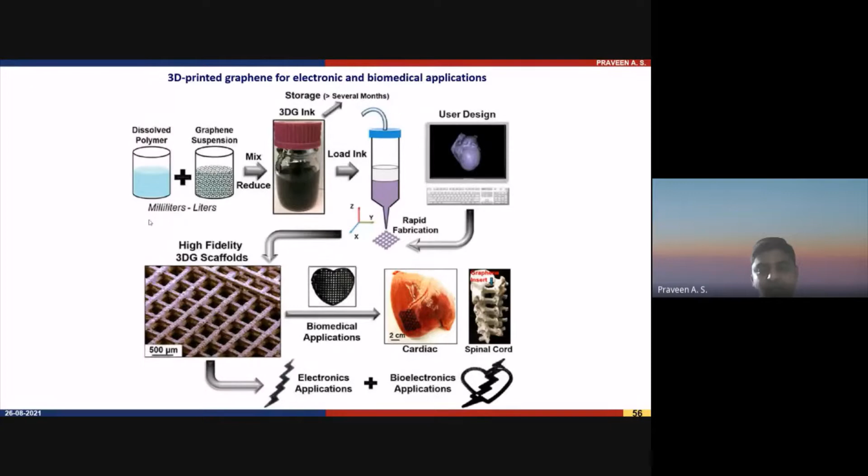As I told you, the basic requirement of a scaffold for biomedical application is that it should have interconnected pores. These interconnected pores act as the location for cell growth, so more cells will grow. At the same time, it should not cause any issues, and the mechanical properties should also be good.

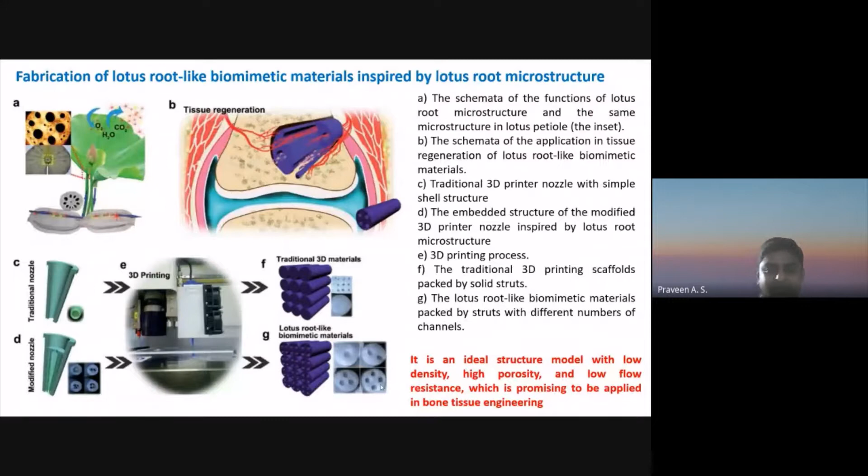But regarding the spanning and all, we have to be very careful by modifying the ink.

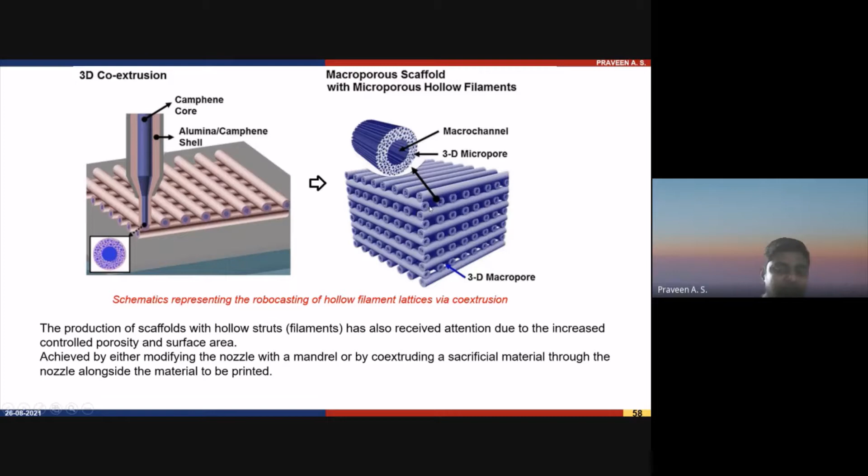So with this, I have come to the end of my presentation. By keeping all these things in mind, our lab is trying to develop this technology.

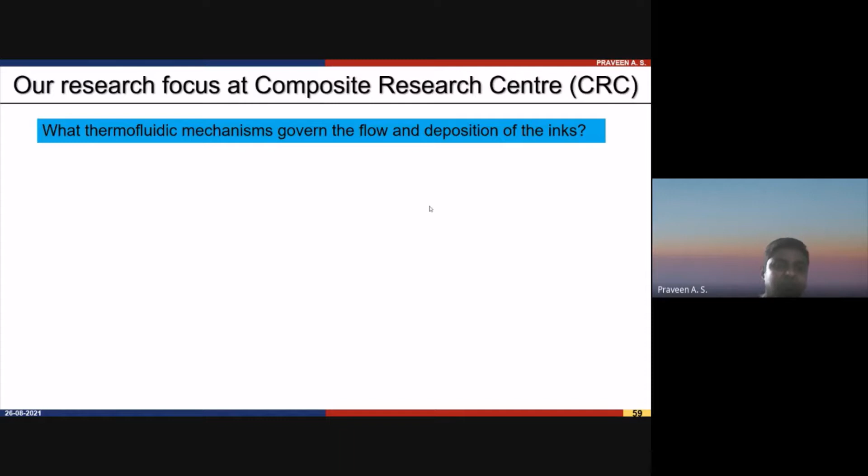As I told you, we need a lot of basic information regarding how the material deposition is taking place, how the flow is taking place. We should know the basic thermofluidic mechanism, and we are also trying to learn that.

As I told you, there are a lot of parameters that will influence your printed part quality and its mechanical properties. So we are trying to optimize the printing speed, nozzle standoff distance, and flow rate, etc.

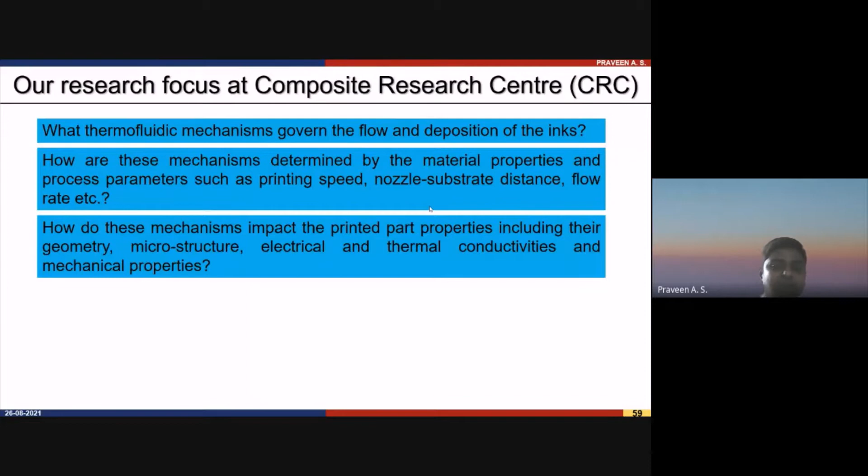After printing, we have to carry out mechanical testing as well as microstructural testing, to check whether we are getting a uniform print and how this printing parameter will influence the mechanical properties. So we are also focusing on that.

Finally, when it comes to biomedical application, accuracy, resolution, and repeatability matter. If I'm getting different shapes or dimensions each time, then I cannot ensure the repeatability of my instrument. So I have to ensure repeatability by designing a suitable control system, and that is also something we are working on.

As I told you, now we are using a pneumatic based extrusion system. Instead of pneumatic, we are planning for a screw type extrusion where we can handle precise control of flow as well as high viscosity materials. So these are our focus areas.

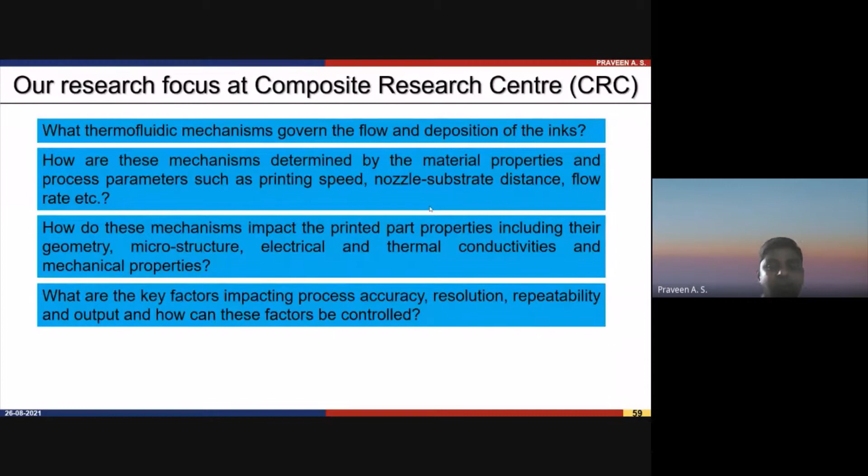Apart from this direct ink writing, we are working on fused deposition modeling, and we are developing some structures inspired from the bamboo tree cross section. Here you see the cross section of the bamboo tree, it looks like a forest. Based on this, we created some porous structures like this.

Here it is a circular structure, rectangular and circular with some interconnections, and triangular structures. Anyone with an FDM printer can try these kinds of designs, but you have to see what is the biomimetic structure, what designs we can use.

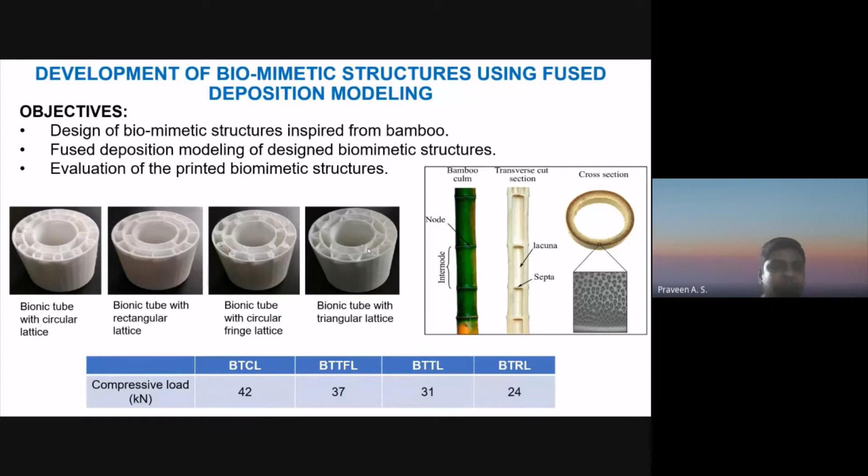God is the best engineer. You can get inspired from nature, and use that design for solving our daily life problems. So this kind of structure we can use for a shock absorbing scaffold or a lattice structure like this. We are also working on that.

As I told you, 3D printing has a lot of applications in different fields like biomedical, aerospace, automobile industries—everywhere there is a lot of scope. Now, conventional manufacturing techniques have been replaced by additive manufacturing in order to achieve specific targets, such as high strength materials, new materials, multi-materials, or composite materials.

But in the case of biomedical applications, the next level is developing organs like heart, ear, or kidney, because in India also a lot of transplantation is taking place. For organ transplantation we need a donor, but because of the scarcity of donors, patients are not getting treated through transplantation.

So if we are able to create an artificial organ through bioprinting, we can use it—it works on the direct ink writing technique. In that ink we embed cells, which will create the required tissue. So there is a lot of research going on in bioprinting, based on direct ink writing.

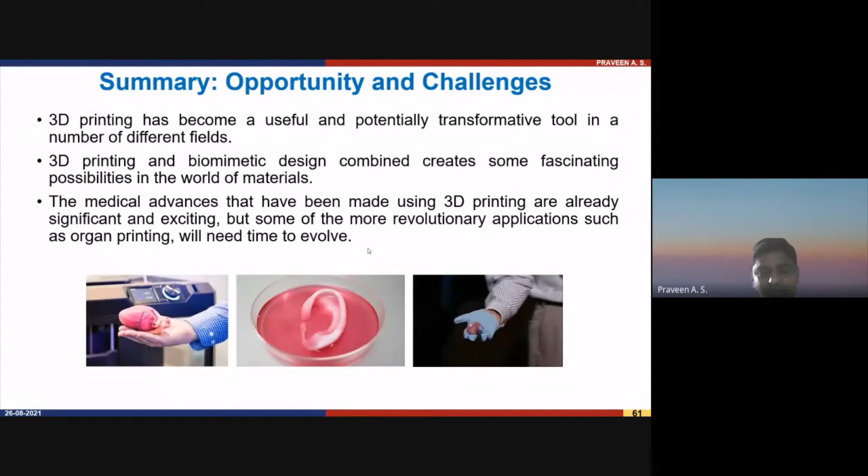Also, KFC printed artificial meat using a direct ink writing technique. For food printing also, we are using direct ink writing technique. So there are a lot of challenges and opportunities available in direct ink writing—as I told you, you can develop a new ink or a new material.

In order to get required functionality and mechanical properties, we combine two or three materials. Ceramics have disadvantages like high modulus value and low impact strength or fracture toughness. So how can we overcome this? By adding some kind of polymer or metal. A professor from IISc Bangalore, Bikramjit Basu, is working on improving the fracture toughness of ceramics by adding metals, using binder jet 3D printing.

As I told you, the critical thing in direct writing is preparation of the ink. You should have good knowledge of the bonding between your ceramic particle and polymer, and the basic mechanism of how to prepare a homogeneous mixture out of the selected binder and ceramic particle. We need some chemistry knowledge and collaboration with chemistry people, so that is very challenging. If you're able to address these issues, you can create a very good product out of ceramics, which can be used for structural, functional, or biological applications.